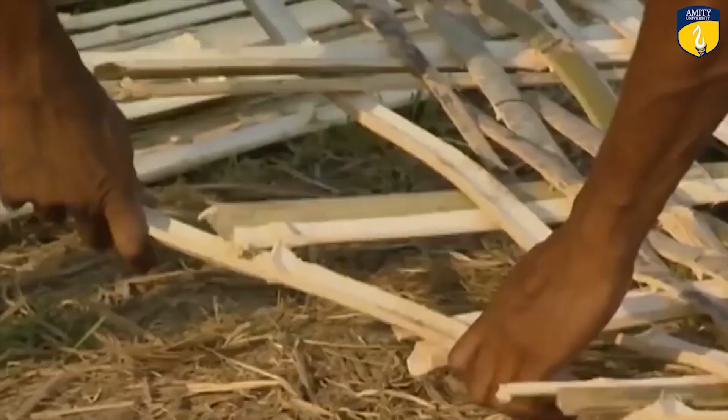India possesses about 8.9% tribal population, among which is the Koya tribe, located in Telangana. They are the sole organizers of the largest tribal festival in Asia, Medaram Jatara, experiencing 10 to 15 million people. Still, the Koyas strive for survival and recognition in society.

The site is located in Bussapur village in Warangal district, Telangana. It is accessed through a 10-meter wide road which divides the site into two halves. A 15-meter wide Laknavaram lake runs beside the site, with irrigation fields on the right side.

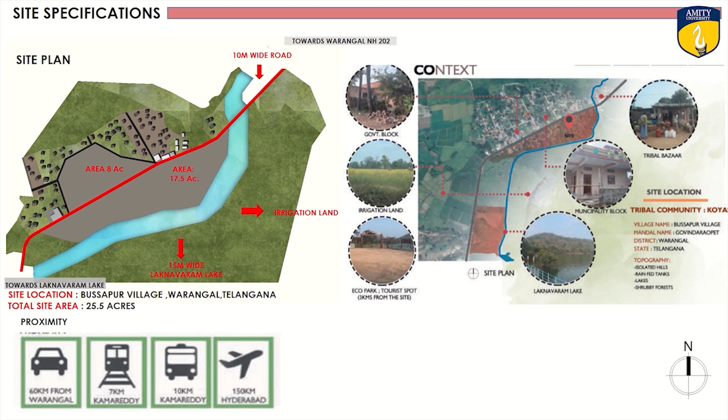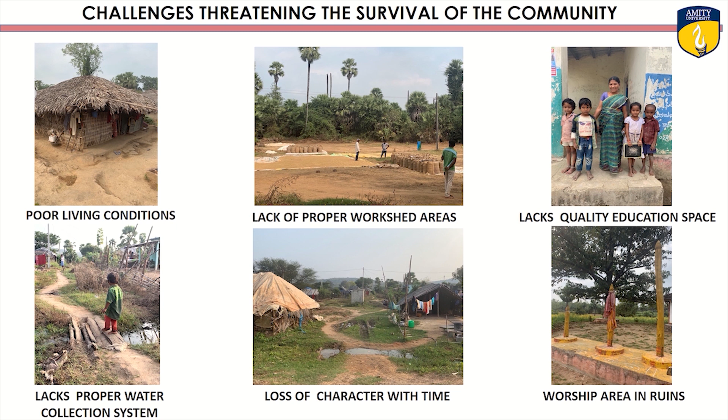The project aims for a wholesome development of the community through design strategies developed keeping in mind the growth of an individual as well as the community. Challenges threatening the survival of the community are poor living conditions, lack of proper workshed areas, lack of quality education space, lack of proper water collection system, loss of character with time, and a worship area in ruins.

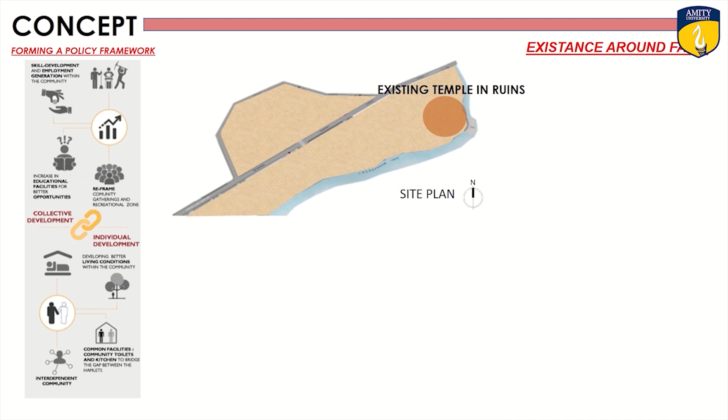The concept revolves around two main aspects. One, forming a policy framework where collective and individual development will go hand in hand. Derived areas to be designed are a Skill Development Center, Education Center, Cultural Display Area, better habitable areas, worksheds, and common facilities. Second, the aspect focuses on the faith of people as a focal point.

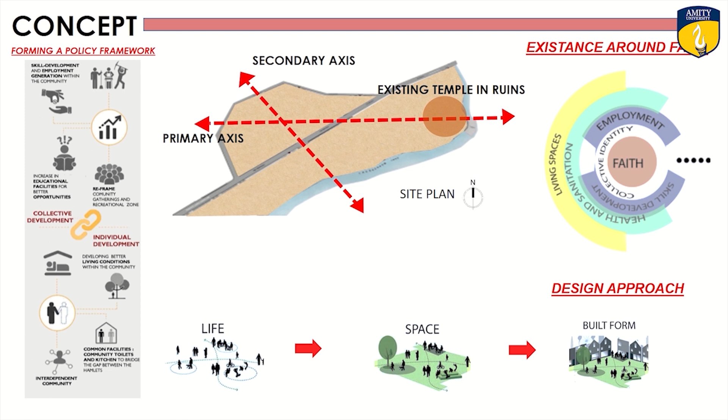A primary axis is conceptualized through the existing temple, and a secondary axis through the middle of the site. Therefore, the design approach will be understanding the life, the space, and finally the built form. Secondary axes have already been drawn on the site. The site experiences prevailing wind from the southeastern direction.

The tribal dwellings are placed on the primary axis, facing towards the existing temple. The workshed area is placed just next to the dwellings, creating a major chunk in between designated for common services and recreational activities for the tribals.

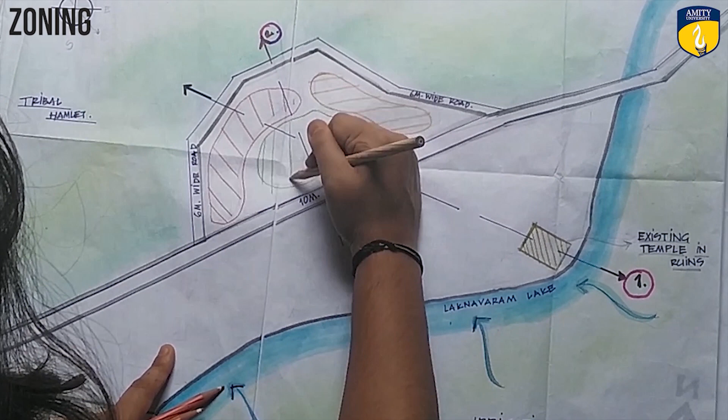In Zone 2, to make accessibility easier for the children, the Pathshala has been placed opposite the habitat area, orienting towards the prevailing wind direction. Creation of intermediate open spaces for better learning and retaining around the tree learning style is maintained.

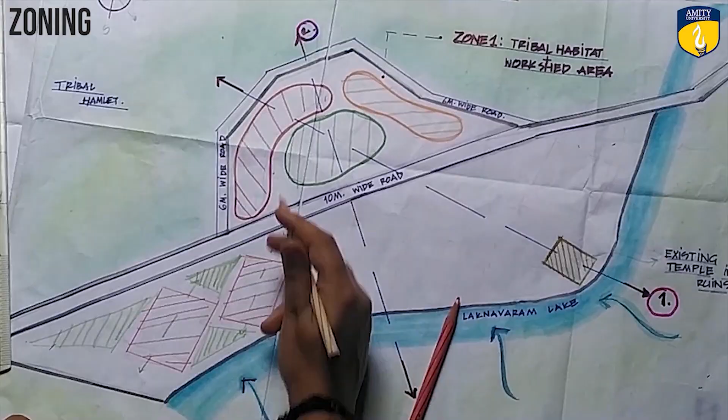Next to the temple, the Training and Skill Development Center is placed. As for them, craft is worship. The longer side faces towards the direction of the prevailing wind from the southeastern direction. The open green spaces will act as hands-on construction areas for the trainees as well.

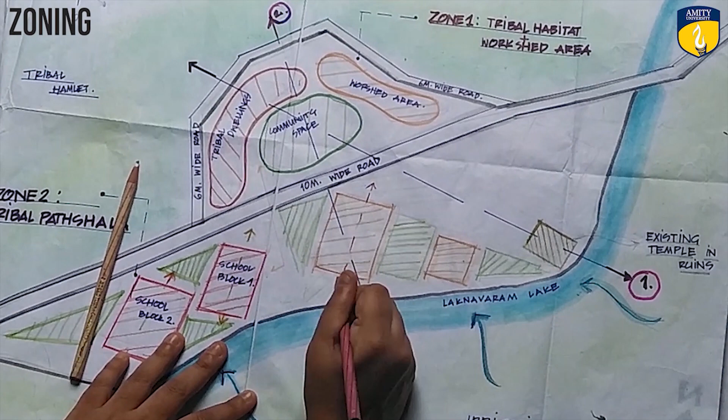Therefore, a major connection is formed. The whole area in front of the temple has been pedestrianized for the tribals as well as the tourists. Next to the temple is the cultural display area placed, which lies at the initial point of the site, making the area more visible to the people.

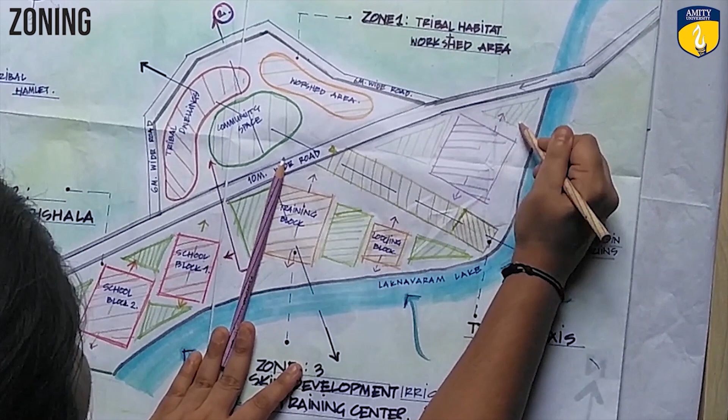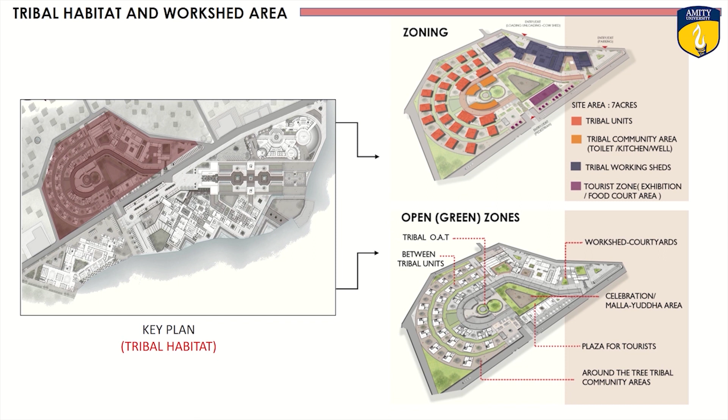Hence, the spaces are designed keeping the existing temple faith as a factor. The primary users of the tribal habitat and workshed area are the tribals themselves. The open green spaces depict the common gathering areas within the community.

The spaces of a tribal dwelling are designed in accordance with their lifestyle and basic needs: a cattle area on stilts, a personal working area and veranda, a semi-open kitchen, and a separate higher platform for women. Various other elements also reflect the indigenous lifestyle of the tribals.

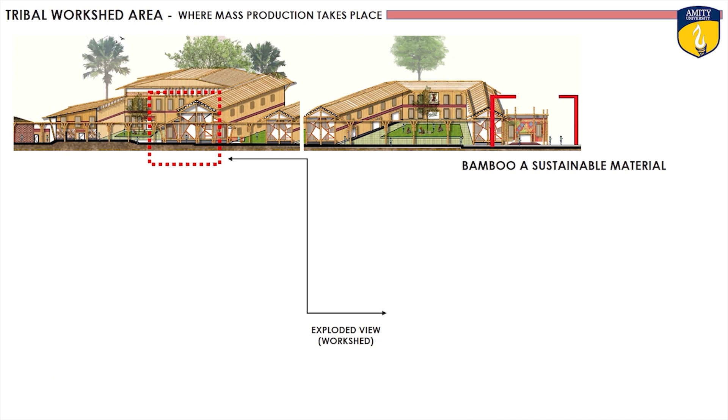In the tribal workshed area, where mass production takes place, bamboo, a sustainable material grown locally by the tribals, is used. As we enter this area, a tourist trail leads us to the workshed area on our right, having semi-open spaces with in-between courtyards, further leading to the habitat area where all the huts are placed, inward facing the temple. This trail acts as an intermediate space between the tourist and the tribals.

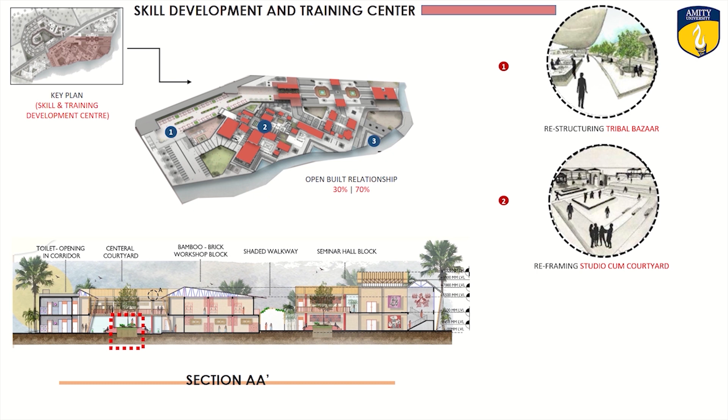The Skill Development and Training Center aims at teaching vernacular architectural techniques to the trainees. A section cutting through the training center depicts a courtyard acting as a multi-purpose area for a studio-cum-hands-on construction technique. The training area focuses on restructuring the tribal bazaar area, reframing studio-cum-courtyards, and reinterpreting ghats near the stream.

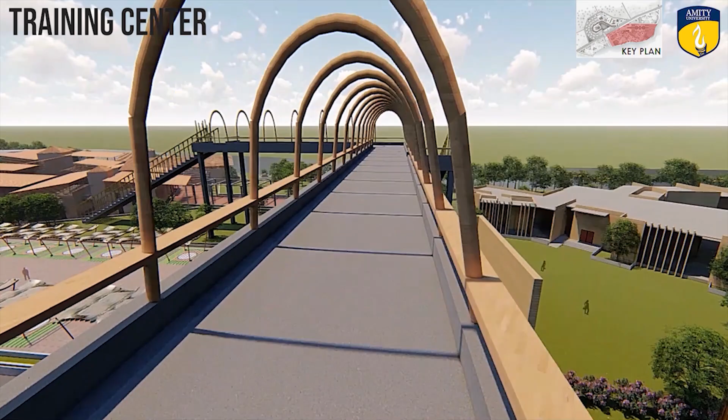The Skill Development and Training Center can be approached through a bridge that connects the habitat area with the training center, where tribals and tourists can learn and grow together.

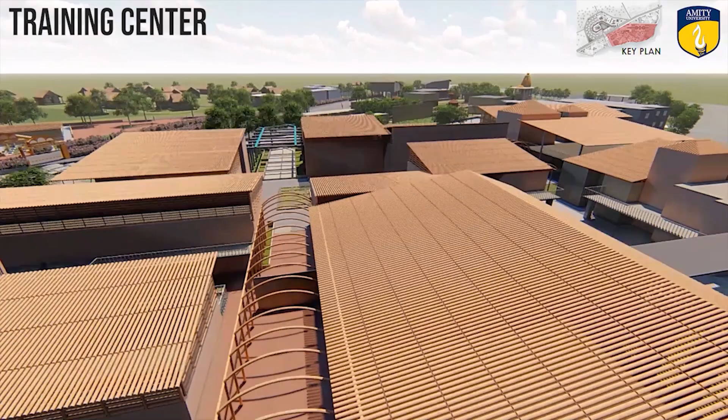Shaded walkways lead to the courtyards used multifunctionally as open training studios. Further leading to the right, ghats are designed to retain their indigenous quality. A lodging area is also designed for the trainees. The temple axis creates a central vista where traditional Koya cultural walls flank on both sides.

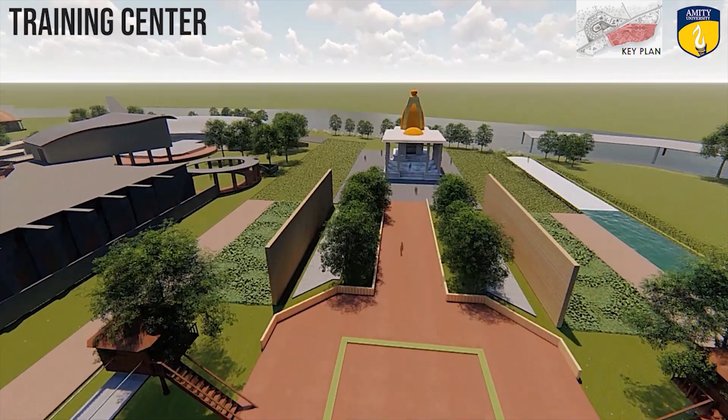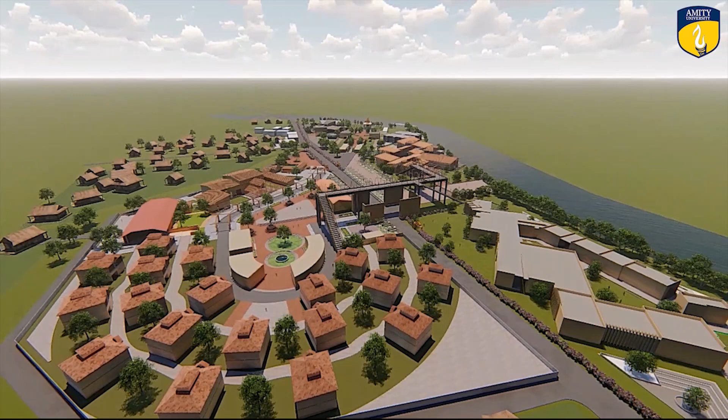The tribal Pathshala is planned in accordance with the existing trees, expanding horizontally. A local medicinal plantation area is designed next to the stream for students to imbibe traditional knowledge. Through this design, a prototype model has been created which will help the tribals residing in or around the site to stand strong in today's scenario while retaining their socio-cultural attributes.